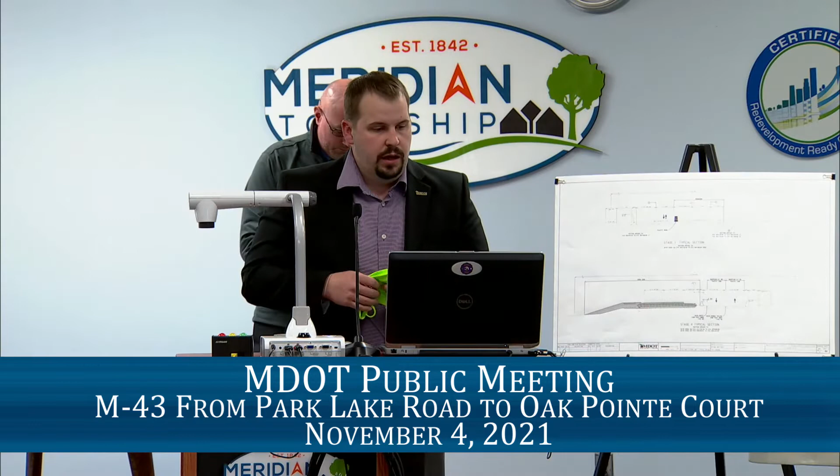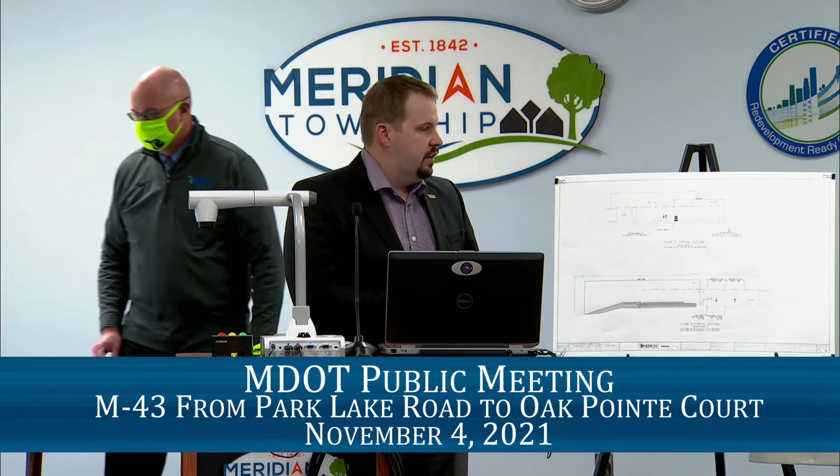As we all are aware, with COVID and everything that's been happening, we're doing kind of in person now, but we're also trying to do virtual to hit all the target audiences that we can to kind of get the information out there.

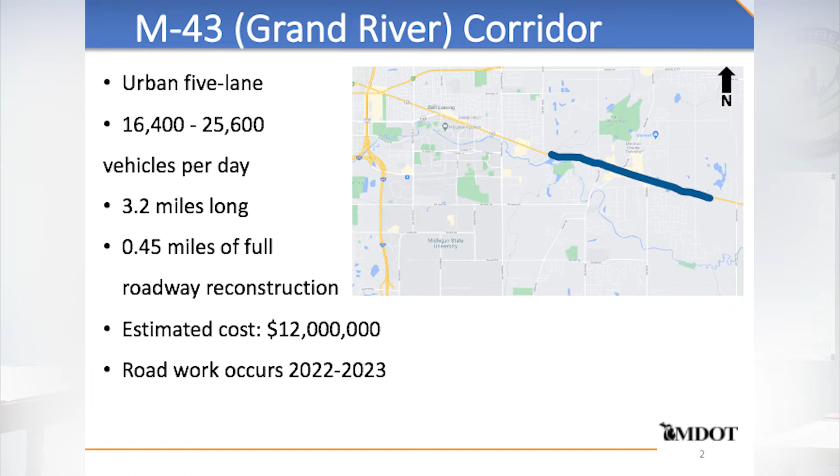So the M-43 corridor project has been in the design process for MDOT here for several years now. Originally, it was a mill and resurface. We've since added some extra work to it we'll talk about in a little bit. It's an urban 5-lane road that gets down to a 3-lane road on the eastern end. We have about 16,000 to 25,000 vehicles per day through that stretch. In the 3.2 mile length, we're doing about half a mile of full reconstruction to help alleviate some of the flooding issues. The estimated cost of this overall project is about $12 million, and roadwork construction is going to begin next year and go into 2023.

So talking about the improvements, we're doing a multiple course mill and resurface that was set up several years ago. As we started looking at the areas and working with and reaching out to the community, we identified that there were some areas that needed extra addressing beyond just a resurface, and that was due to flooding. Areas that we've had concerns with that were brought up to us.

So those two stretches that we're concentrating the reconstruction on are about 1,200 feet from M-43 at the Nakoma Drive area, and then the Okemos Road intersection itself. That's about 1,000 feet, so 500 feet either side.

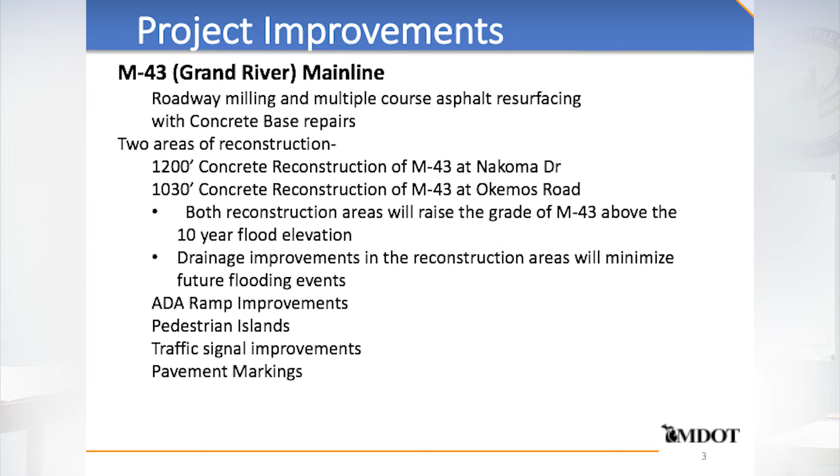Both of those areas will raise M-43 above the 10-year floodplain. It's currently below that, as I'm sure many of you are aware from the frequent flooding that we run into. Drainage improvements are going to be added in there as well for the reconstruction area to help minimize the flooding events in the future and help with drainage as we get surface water.

The project will also include ADA ramp upgrades throughout the corridor, and after reaching out and talking with the township, we've identified three locations for pedestrian islands to help crossing of M-43. And those will be included as well.

Traffic signals, there's going to be miscellaneous improvements through the corridor along with a full modernization at Okemos. And then we will also be doing new pavement markings with the pavement being replaced.

As part of this, it's a long stretch of project, and we've been in communication with the Drain Commissioner's Office, the Road Department, and the Township. Through that communication, we've been identifying other things that can be taken as part of this project to minimize future projects, and that includes upgrading and relocating water main through the stretch, about 1,100 feet of it, just short of that.

Also working with the Drain Commissioner's Office to upgrade the Okemos drain and the Grettenberger drain within the limits of MDOT's project itself. That'll also allow the Drain Commissioner in the future to tie onto that outside of the limits of MDOT's right of way.

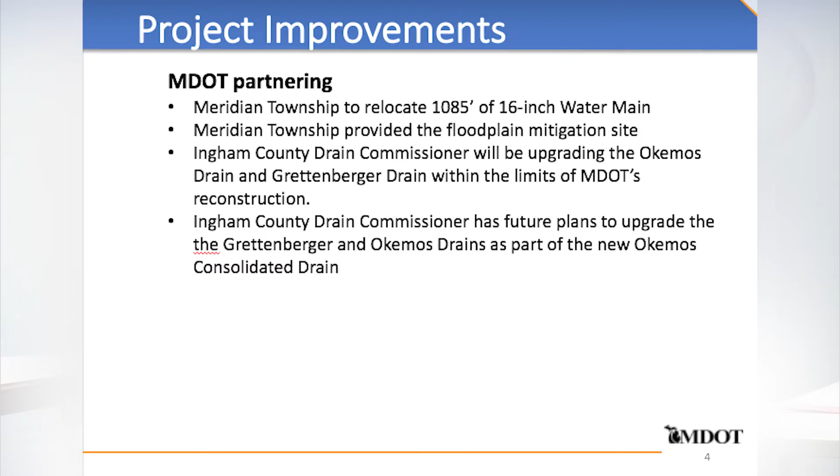So I've got some pictures in here from last year that Jack Rick actually took as an area resident of some of the flooding in these areas that I'm sure you guys have all seen before firsthand.

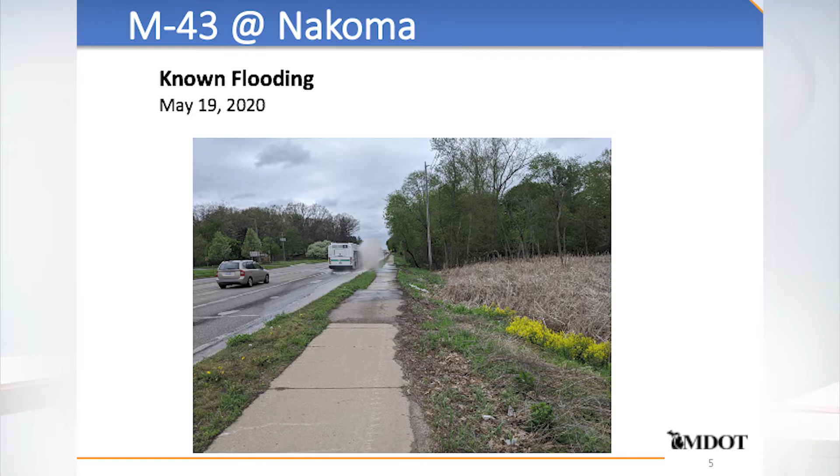Now, the flooding has caused lane issues. That existing sidewalk has settled over the years. We've done several patching jobs to try and help, but it just kind of keeps falling into poor shape. With that, we've had to close lanes through that stretch for days.

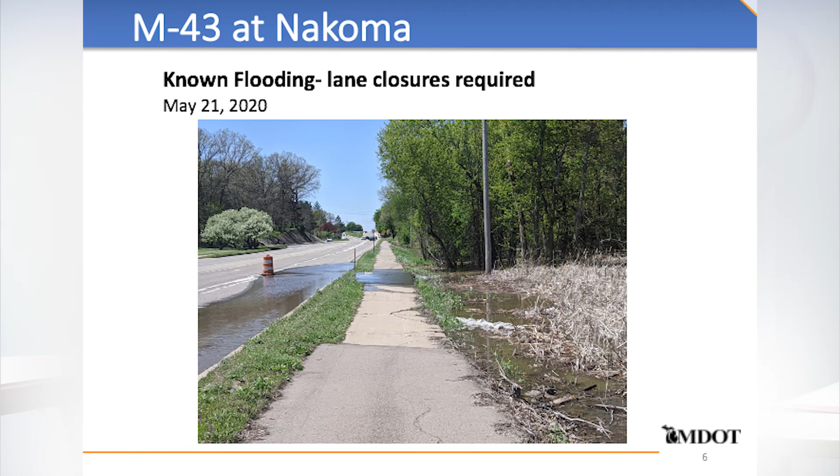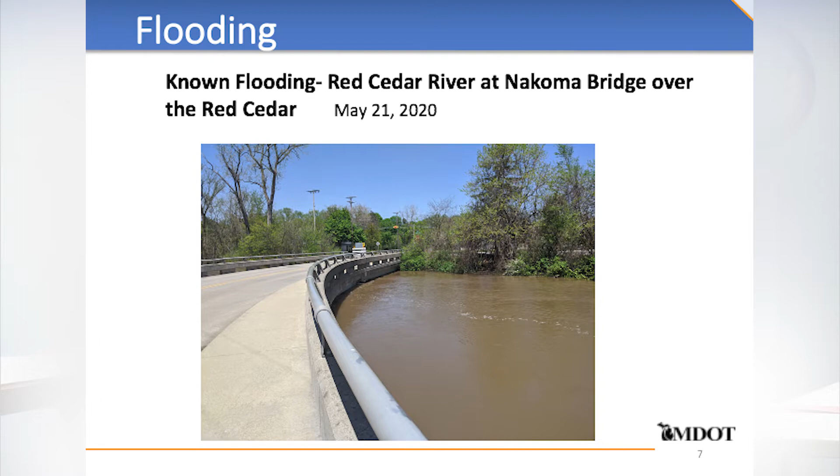As part of the flooding issue, it's not just the roadway. So this is at the Nakoma Bridge over the Red Cedar, one of the high-level points during that event specifically, and also the golf course, right?

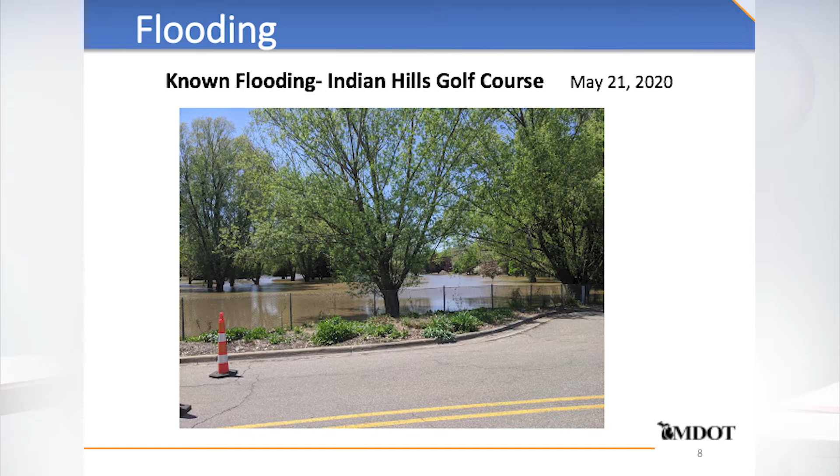So part of this problem, and it's specific to this location, is the general area of the watershed coming down to the river. The MDOT area that we're talking about that contributes to this watershed group is about 24 acres. The overall area that's coming down to this point is about 200,000 acres. So it's a lot of water, a lot of impact.

So when we were identifying what we could do to help mitigate that and make a fix, we were looking at cost effectiveness, but also where the impacts lie. With our project, we'll be raising it about 2 feet, which kicks us out of the 10-year floodplain, or 10-year storm event. So we will still have the occasional flooding issue that we have to resolve.

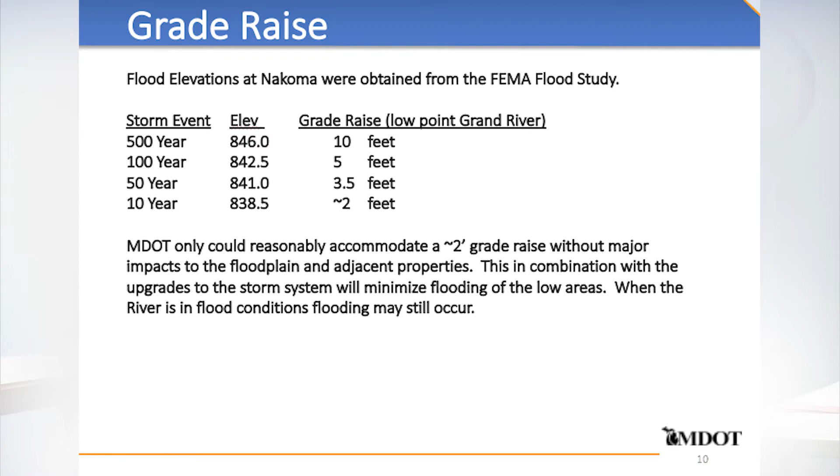But the issue is the further up you raise it, the further back it goes, and the more you push water into the neighboring parcels. It just became a point where we couldn't go any further without having too great a cost and too negative an impact on the area around it. So this will help with the 10-year events, but it won't totally fix the issue, right? There will still be flooding in the future.

So I'm going to turn this over to Jack Rick, who's going to talk about the staging and the MOT scheme and a little bit more of the project information.

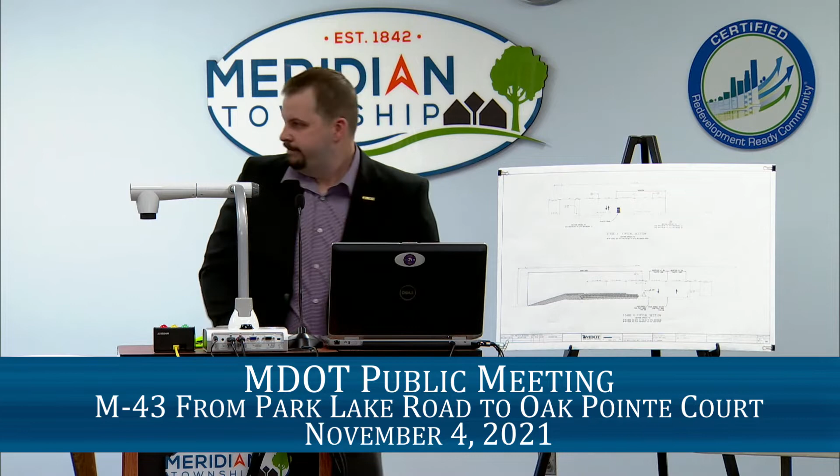I've been with MDOT for over 32 years, and my teammate over there, Warren, is my assistant. Our group of professionals has all been working really hard to come up with some good solutions. We've been partnering with the Drain Commission, Carlos here, and Angie and Jonas from your engineering staff here at the township, and we feel we really have an improvement.

Is it going to solve everything? We know it's not, as far as the flooding. But when you have high water conditions on the river, it's really hard to push water into water that's super high. But we're going to do every effort we can to improve the situation that Alex mentioned.

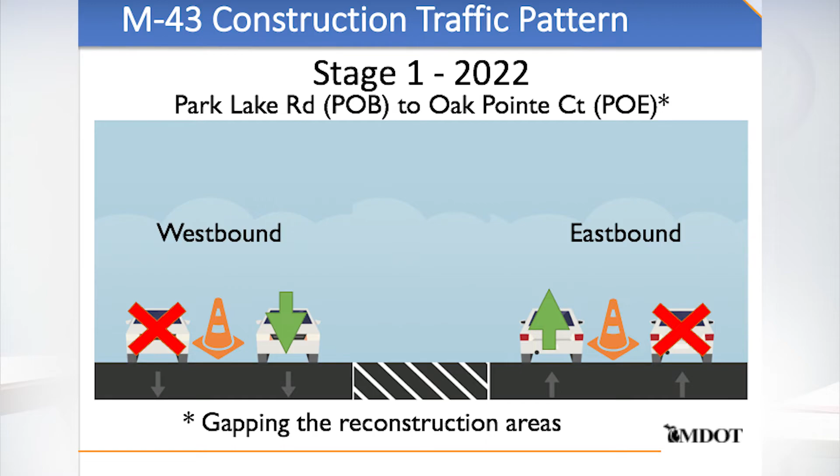So how are we going to build this? The first stage, from beginning to end, we're going to pull the outside lane, very similar to when we did the project to the east, and start with sidewalk ramp upgrades. Right from Park Lake all the way over to Oak Pointe, we're going to be putting in new sidewalk ramps, except in those reconstruct areas. Those will wait until we actually perform the reconstructs. We'll also be doing some temporary work at those reconstruct areas so that we maintain driveways to some of the businesses.

Second stage, we actually begin part of our mill and resurface from west of Marsh to Cornell. So we still have the outside lanes closed, but we're beginning our mill and resurface operation. We've got the sidewalk ramps done, and now the contractor is going to mill and resurface the asphalt over the concrete ramps.

When we're past Cornell, it's really too tight, so we're going to have a little bit of what we call flag control, where one lane at a time is allowed to go through and the contractor does their operation to the end of Oak Pointe, where they finish the mill and resurface.

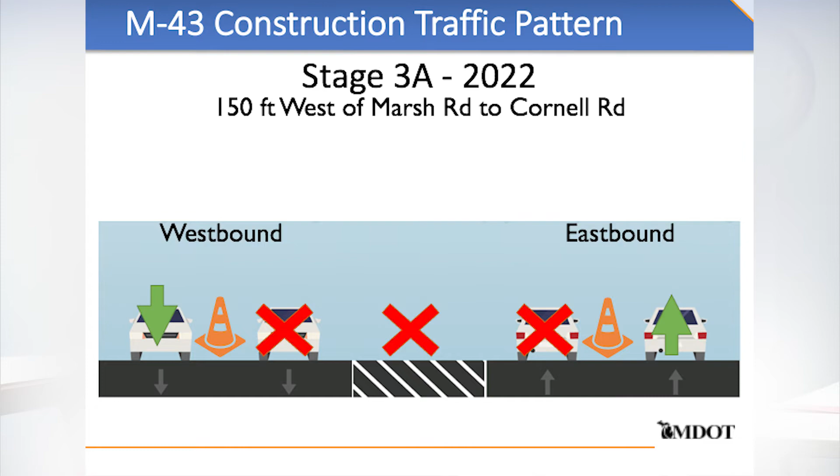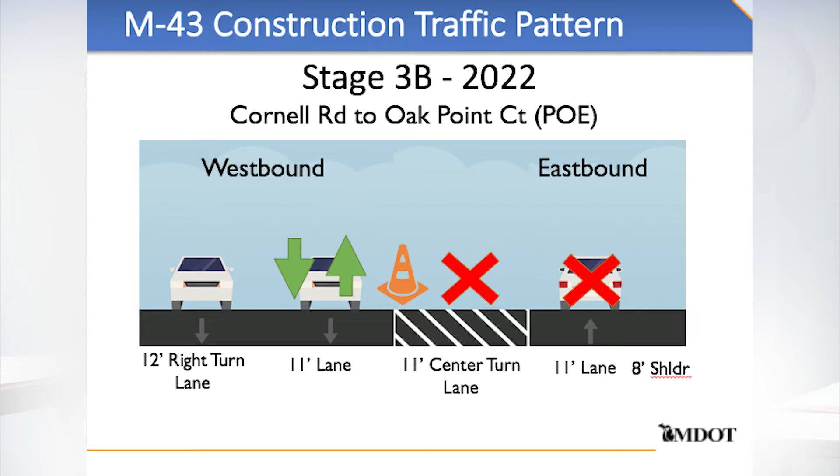So all the mill and resurface is done on the outside, and then we move to the middle three lanes and get that taken care of. That's our next stage. Then, between Cornell and Oak Pointe towards the east, we have to once again do the south half of the road while traffic's maintained with flag control on the north half.

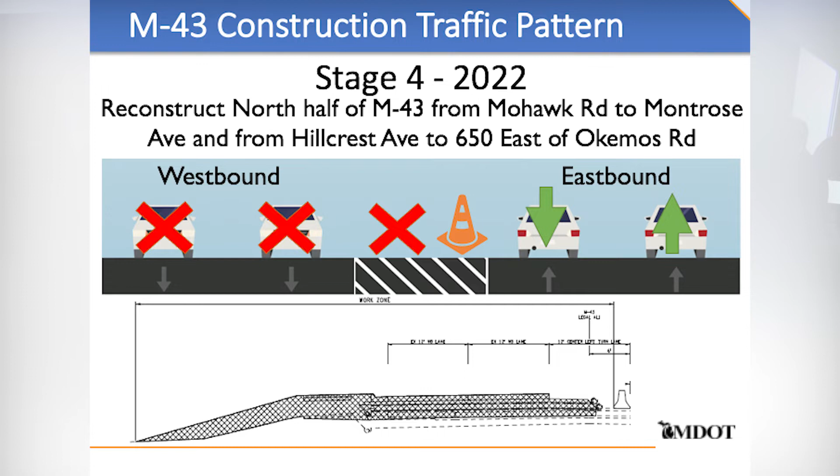And then we move to our major reconstruct stage, which encompasses both the Okemos location and the Nakoma location. We'll maintain one lane in each direction on the south side of the road, and while that's happening, the contractor will have the north half of the road. We'll separate traffic from our contractor in this area because of the amount of work and all the things that need to happen with the temporary concrete barrier.

Similar to what you see on freeways when we separate traffic from a reconstruct area, we're using a similar technique there to keep it safe both for the motorists and for those folks we work with on a daily basis, those people either constructing the road or inspecting it, some of our staff and the team members we have out there.

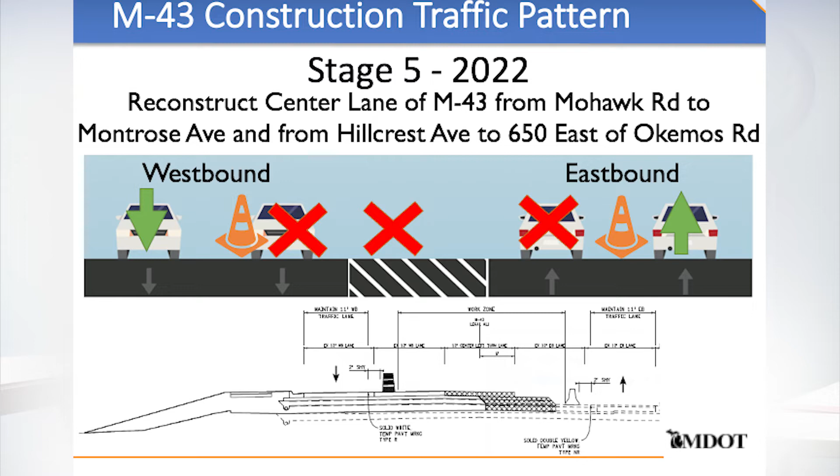We have a kind of a mini sub-stage where we can't get to the center left turn lane while we're maintaining two lanes of traffic on the south side. So once we have two lanes done on the north side of the road and they're built up a little higher, then we'll split traffic in stage 5, where one lane of traffic is on westbound and one lane is on eastbound, split by that temporary barrier between the new pavement and the old pavement. And the contractor will then take care of the center left turn lane in the reconstruct area.

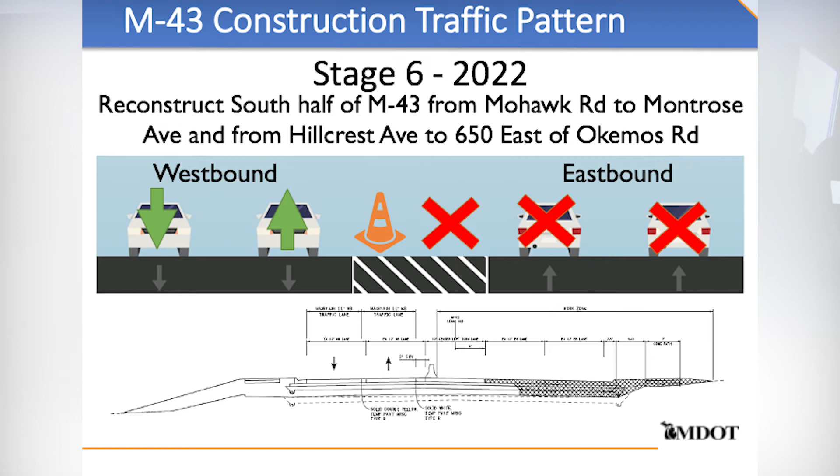Then, when that's done, we move the barrier one more time, get it up on the brand new concrete pavement. We maintain two lanes of traffic on the north half of the road while the contractor will have the south half of the road.

Now we anticipate all that work, I'm going to go back one slide to take you through most of the 2022 construction season. Because it's a lot of underground work, the water main we mentioned, all of it takes time, takes testing time, takes time to collaborate with other outside agencies to do proper inspections.

But at the end of 2022, all of our reconstruct areas would be complete. Then the following year, we'll have another mill and resurface basically from the beginning of the job through our reconstruct areas. We're going to gap those reconstructs because they're already going to be completed, and it'll follow the prior year's staging.

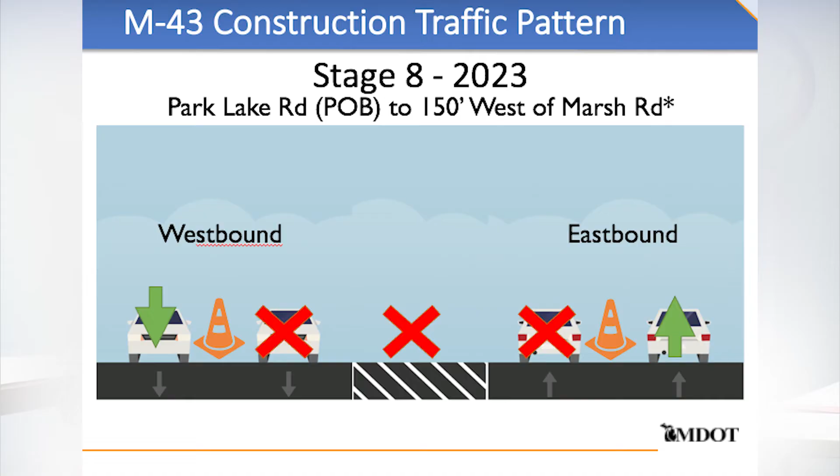So we'll first do the outside lanes, do a mill and resurface. Then we'll do the inside lanes, very simplistically. And this has worked well previously to the west. It does take time though, so a lot of effort, a lot of collaboration.

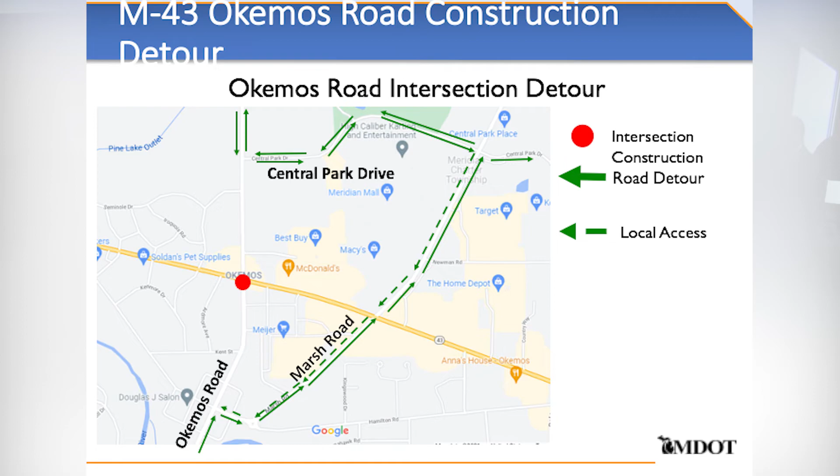So I'm going to talk a little bit about our construction detours. One of the big ones, and everybody's aware of our county's road project - they've already begun utility relocation work on Okemos Road in advance of the bridge reconstruction. I'm not sure exactly when the bridge contractor is going to be there, but everything you see out there so far is a private utility company doing work in advance of the county's bridge contractor. They'll probably be out there in winter or early spring, starting the bridge removal once all those utilities have been completed.

But it takes time to get out of the way. So what is their plan? Their plan is to maintain northbound Okemos Road. When we begin our work and do a detour on Okemos Road, they will tie into our detour, or they may have an advanced detour for southbound that uses Central Park Drive over to Dobie directly down to Jolly. They're always going to maintain the northbound Okemos movement, so we're collaborating together, making sure it all meshes together overall from a scheme.

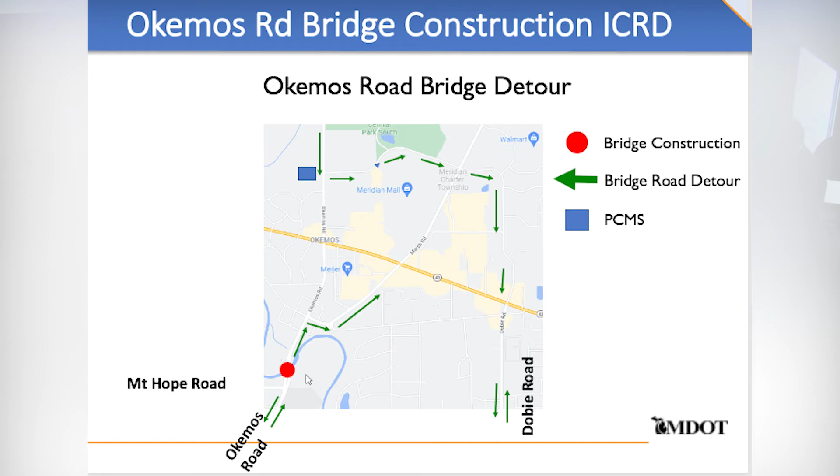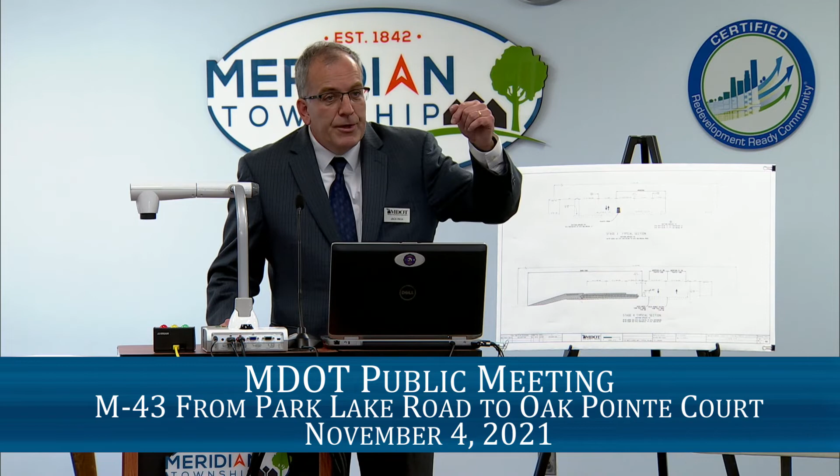Now, one thing to mention, we are well aware of potential flooding issues. Our secondary detour, should Okemos Road be closed coming southbound, will be over to Marsh. So as traffic's coming south from like Saginaw, directly south, Park Lake over to Marsh, and come down into this detour here.

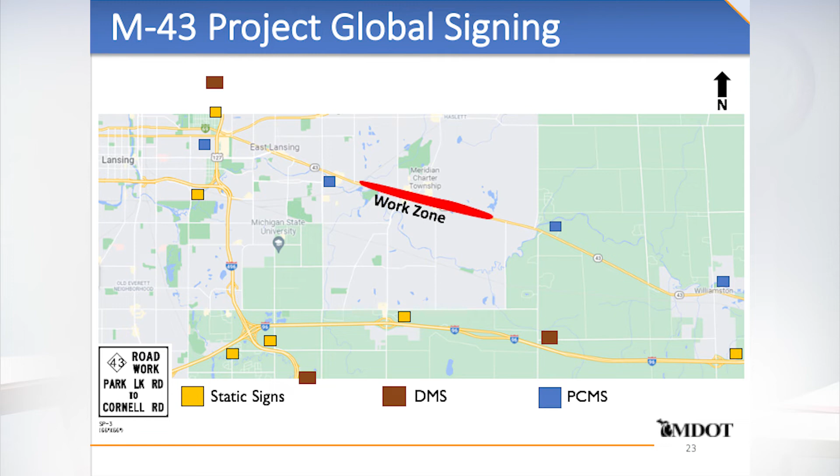In addition to our localized signing, we're going to do some what we call global signing, way outside the limits of our project. So you can see here, US 127 to the north. We have digital message boards both to the north, to the south, and to the east. All those we're going to start putting messages out in advance of the construction. We'll put up some static signs advising motorists that there's work going on between Park Lake and Cornell.

And we'll put digital message boards as well along the corridor, right along Grand River. We've got to get that message out, and it takes time for everybody to acclimate. What we typically find is it usually takes a couple weeks till the traffic pattern reestablishes itself. It's not perfect, but our traffic team and our operations team work with both our township officials and the road commission, and they'll review the timing of signals, adjust timing accordingly to get traffic moved through as best we can.

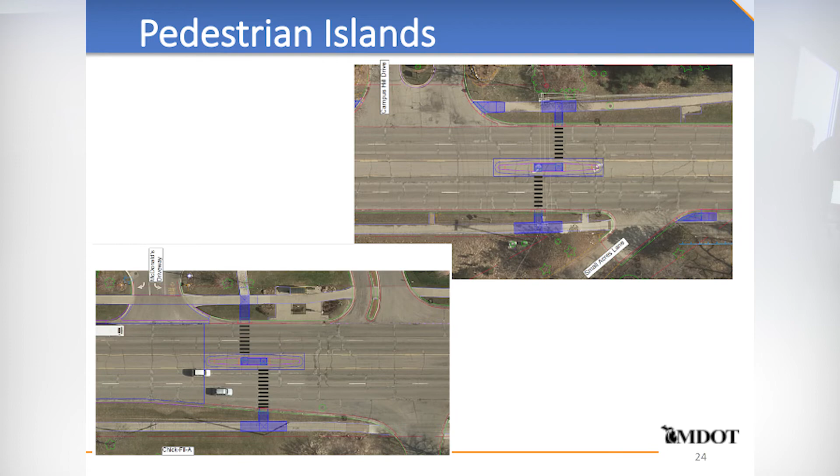Another highlight that was brought to our attention by the township that we've incorporated into our project are pedestrian islands. One of the issues I see out here is we do have a lot of pedestrians, and sometimes they cross in undesirable locations, or what kind of feels a little bit unsafe. The first one I notice is right after the railroad tracks, you come down, and over here at Campus Hill Drive, we've got that big apartment complex there, directly at a bus stop.

We're going to put a pedestrian island. If you drive downtown East Lansing, just west of Hagedorn, we put in a pedestrian island there as a safety area that the pedestrian can go from sidewalk to the middle, to the center left turn lane, feel safe. It's not 100% safe, and nothing is, but it makes it easier to get across the street in a protected curbed island. So we'll be installing three of those.

I've got one here shown at Campus Hill, a second one right in front of Meijer, where the other bus stop is to the east, kind of like right by McDonald's. Everybody know where that is? And a third one just east of Washington Heights by the bank. So a nice set of pedestrian movements will be added. This one will be added early, but the other two, because of all the reconstruct effort, we'll add those at the end of the project.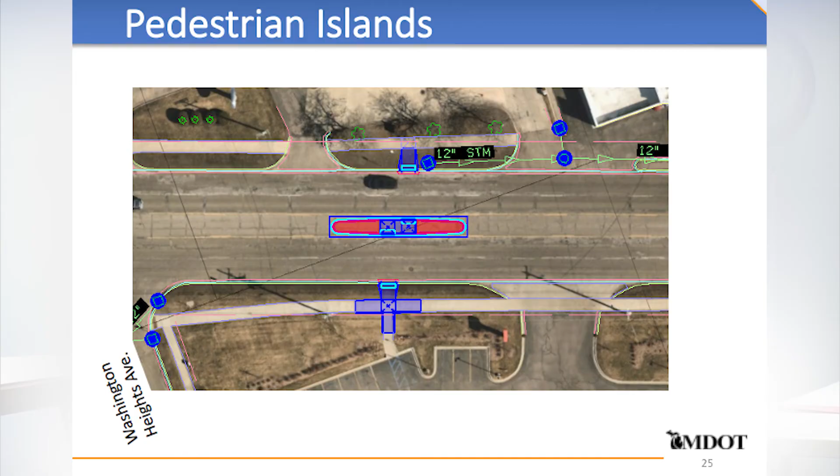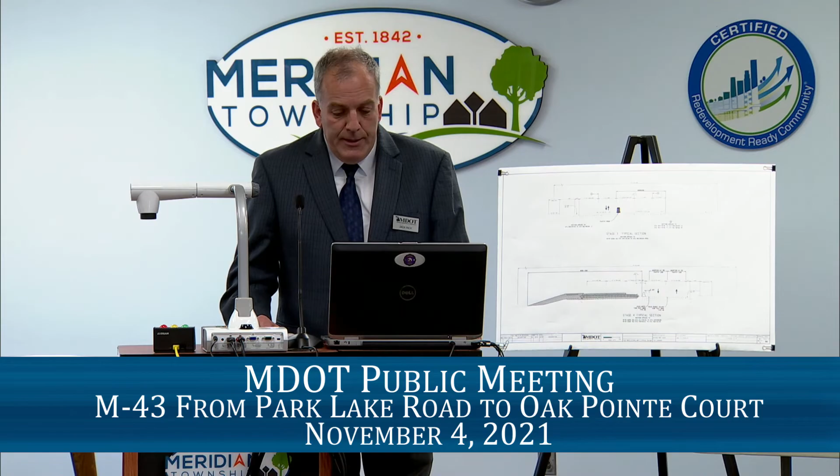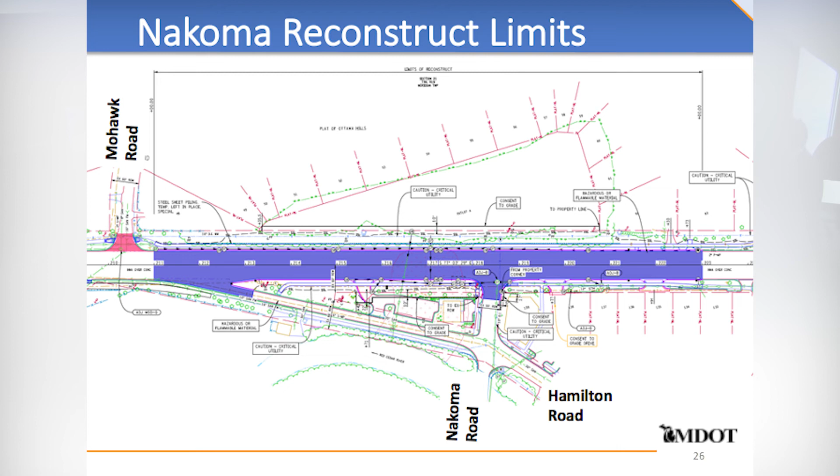So a little bit about the limits of the Nakoma Reconstruct. It starts a little bit east of Mohawk Road and covers Nakoma, and then a little bit to the east of the first driveway to that shopping mall there.

And the second location of our reconstruct is pretty much centered right on Okemos Road.

Everybody knows, or if you live here, you know, when we do have flooding on the streets, it occurs at these two locations. Why does it occur here? They're roughly the same elevation.

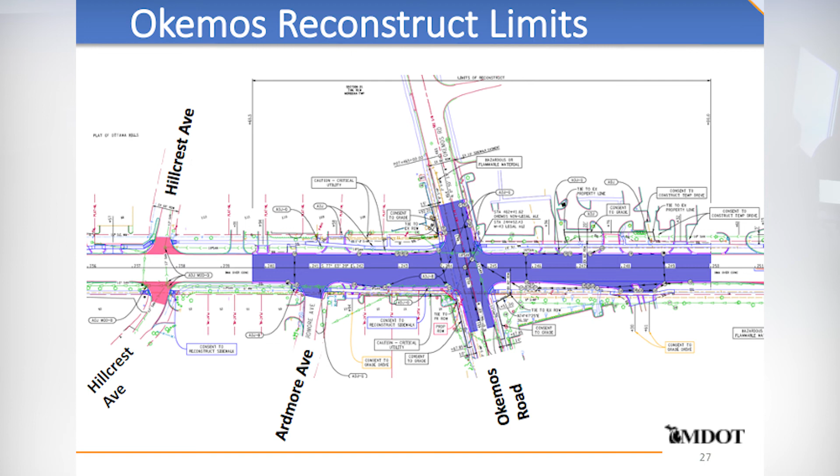There are low points along Grand River. They're too low right now. We're going to do something about that to address the situation.

Another item we work closely on with the Drain Commission: they've agreed to us eliminating a siphon that goes underneath Okemos Road as part of our storm system, and we're going to upgrade a portion of the Okemos drain and tap a portion of our drainage into that. That'll alleviate some pressure downstream, and also improve the drainage overall in the area.

We're going to add a brand new drainage system with quality control structures in there. It's a really nice element we're adding here.

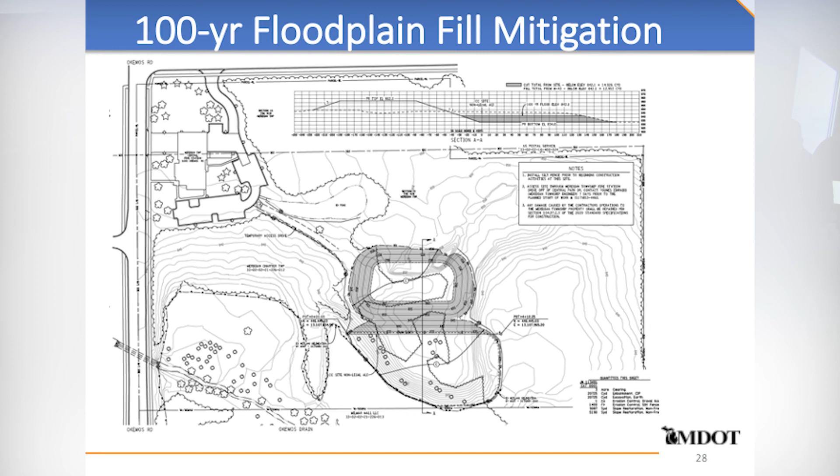The final thing I wanted to mention is kind of an important part of what we're doing. Anytime you put fill into the floodplain, you have to do an offsetting cut somewhere. So we have fill going within the 100-year floodplain to raise the grade of the road.

Jonas and I and a couple other folks went out and looked all over the township to find a reasonable location where we could improve our drainage and offset the cut for the fill we're doing.

And we found a location that the township has agreed to. It's a township-owned parcel adjacent to the Okemos drain, south of Central Park Drive, directly south of the fire station, in that land area.

So we're very thankful, the department is, for the collaboration we've had with the township, and all the efforts being made by both the township and the Drain Commission in trying to improve our situation out here.

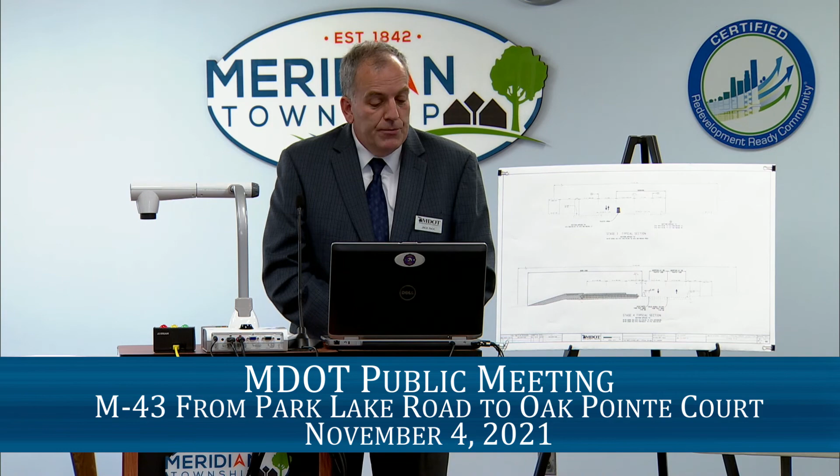As Craig or Alex mentioned before, we'll have future outreach meetings. We're going to repeat this presentation at 4 o'clock, and we're also going to have a website for the project.

So with that, we're going to go over to questions and answers. Greg, you want to come back up?

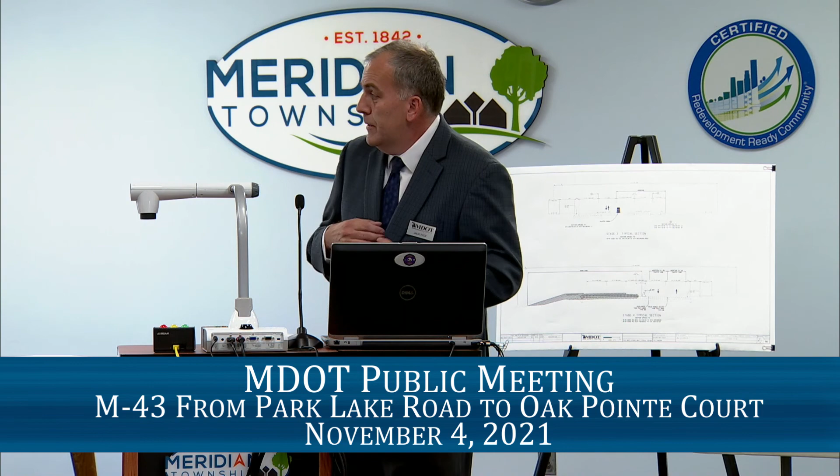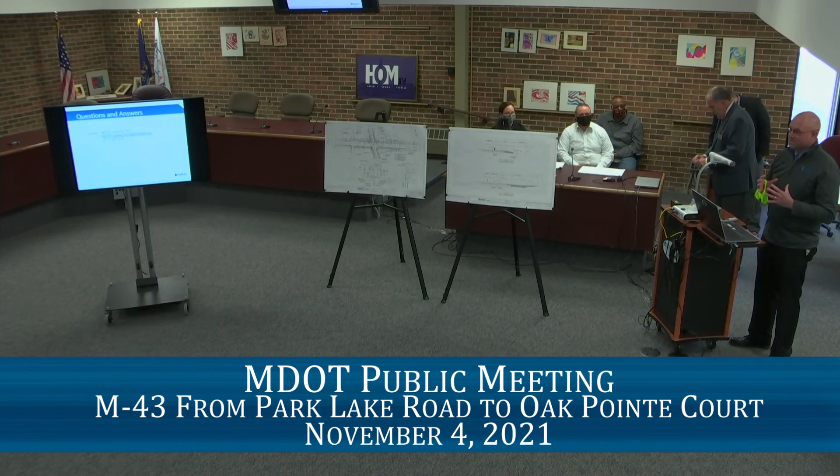As you can hear, there was a lot of coordination, a lot of different aspects of the project to put the whole set of plans together. We've been working on this for a long time, and each individual agency had to iron out a lot of their own details before we could incorporate them together. That's one of the reasons we've been working on this project for so long before coming out to the public - we didn't have a set of plans with everything in one spot where we could answer the questions we knew we'd get.

Now that we have that information, we're here to take input, answer questions, and continue to move the process forward. We're looking at a January letting, which for us means putting this out for bid in January of 2022.

As Jack covered, we plan on starting as early as we can in the spring and wrapping up the major work by the end of '22, then coming back to do some tie-in work and top course asphalt paving in early summer of '23.

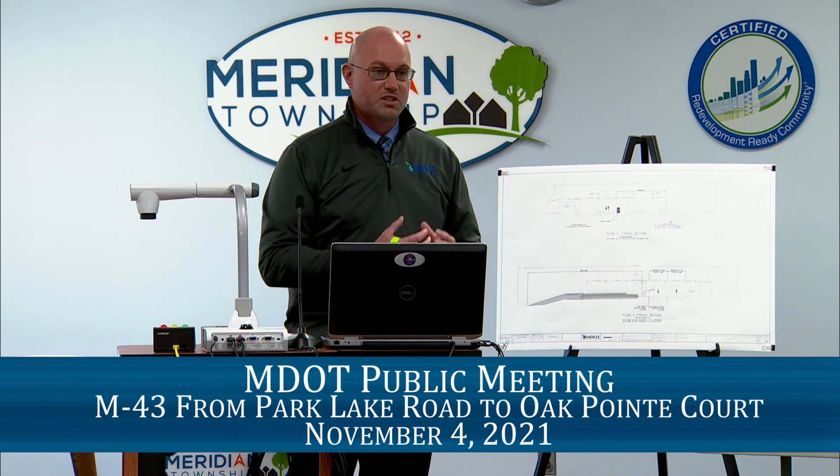So with that, that's pretty much everything we had to cover in this presentation. We can take questions, and we also have a lot of resources here to point out specifics if somebody has questions about how this will impact their driveway or whatever else.